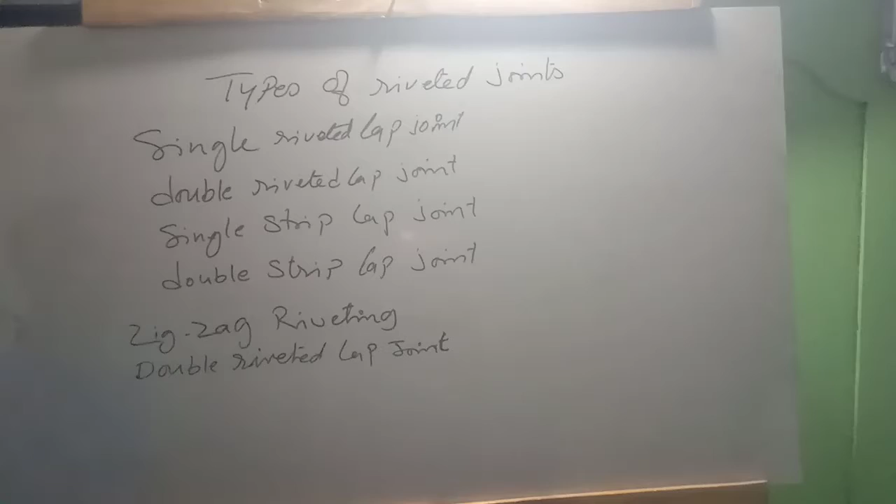Now, types of riveted joints. See, when you are joining two sheets with a rivet, not a small strip of the sheet, big sheets, 1 into 1 feet sheet or bucket length, where the width of the sheet is more, a number of chain rivetings has to be done. So what are you doing? Different types of rivet joints are made.

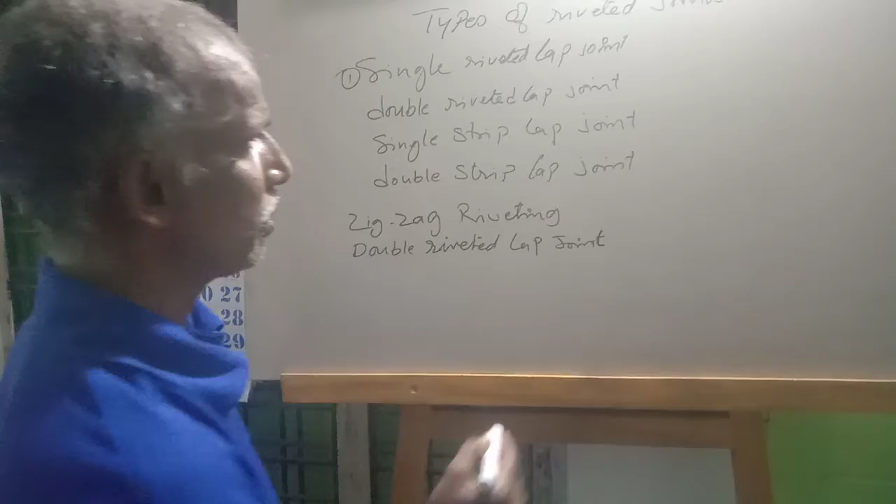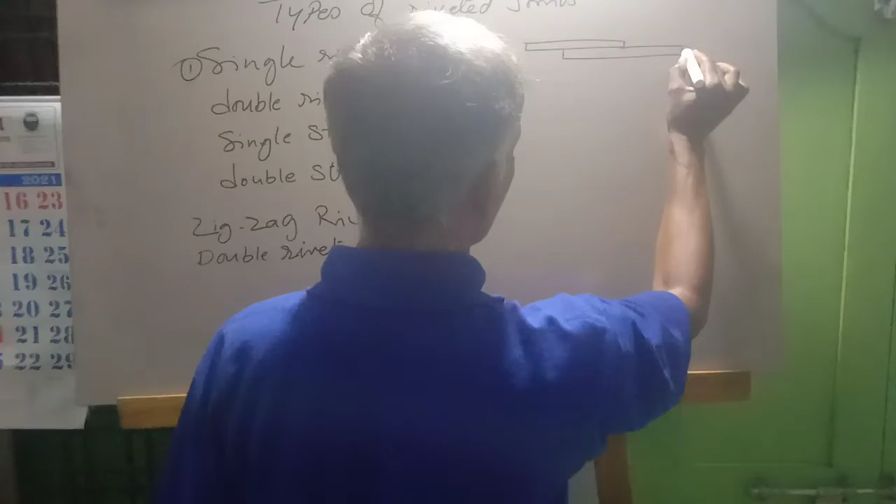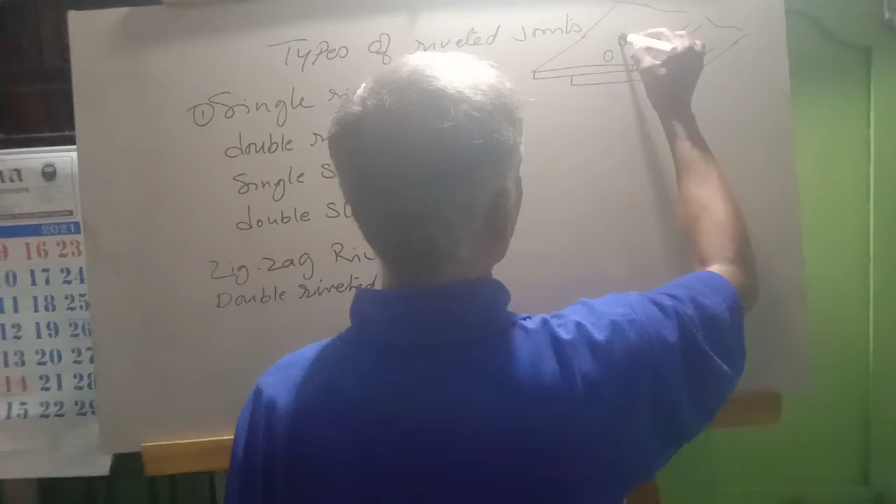First one is single riveted lap joint. Okay. Single riveted lap joint. This is sheet 1 over on the top. What we are putting is called lapping. Okay. Single means the row of rivet will be single. Okay, this is where they do single.

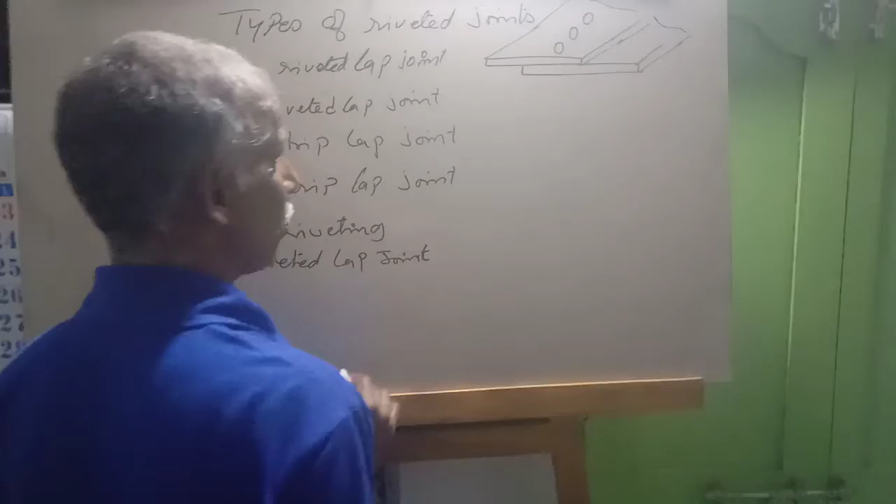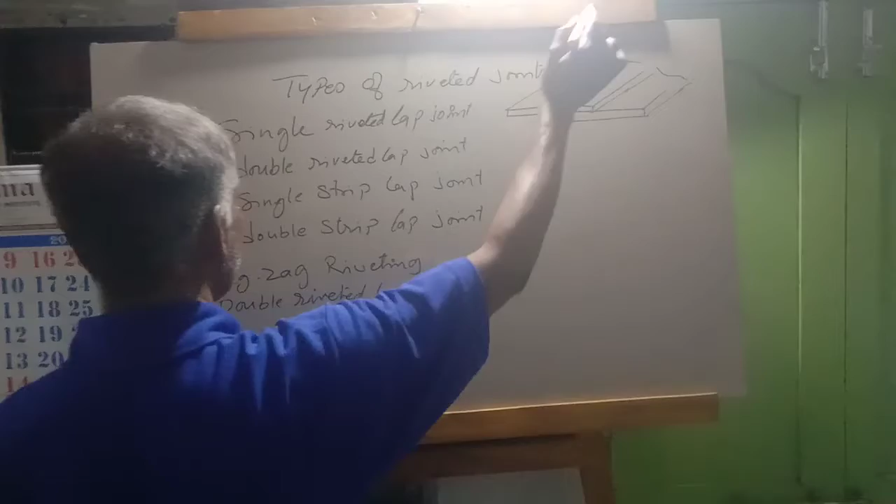Single means what? A number of rivets in a single line is called single. The number of rivet lines is called the number of rows. Only one row is a rivet line. So that is single riveted lap joint. Lap means the sheet is lapped. Now generally they'll do the drawing in this way. Right. Single riveting lap joint.

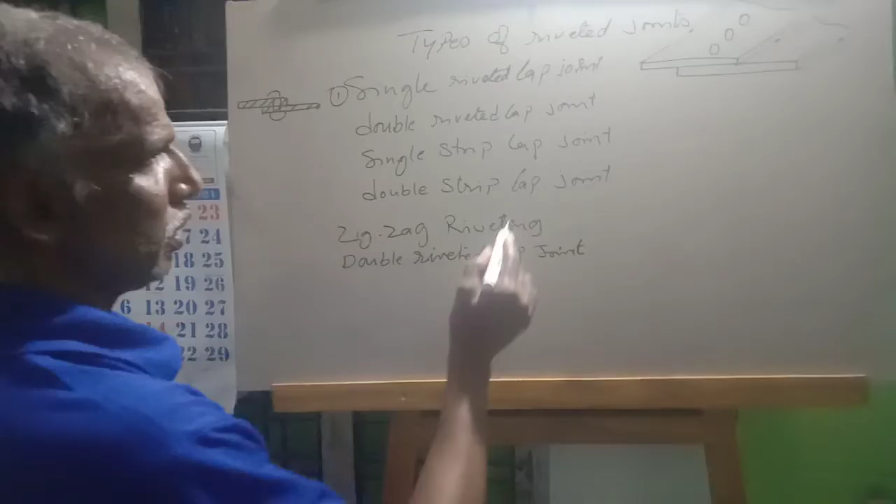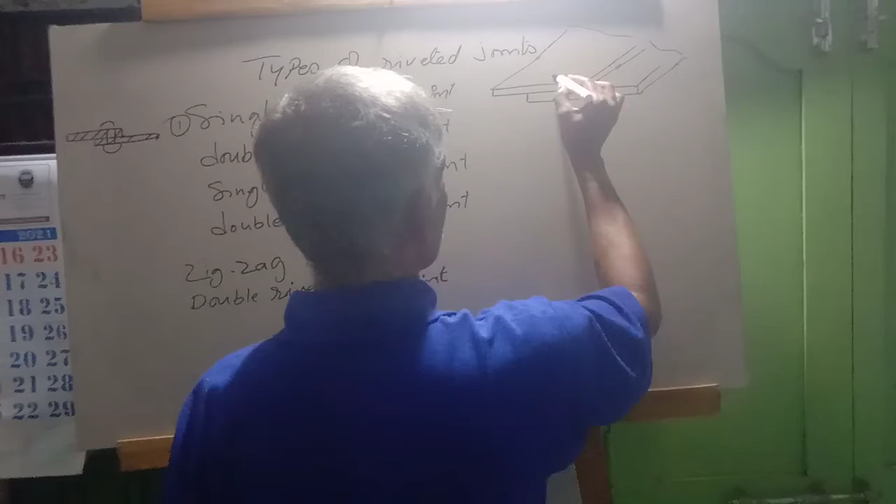Now same way, if it is double riveting lap joint. What we'll do? Here we'll do the riveting, but not a single row, two rows. Here is one rivet, here is one rivet, here is one rivet. Now how many rows of rivets are there? Two rows. That is called double. But the joint is lap only.

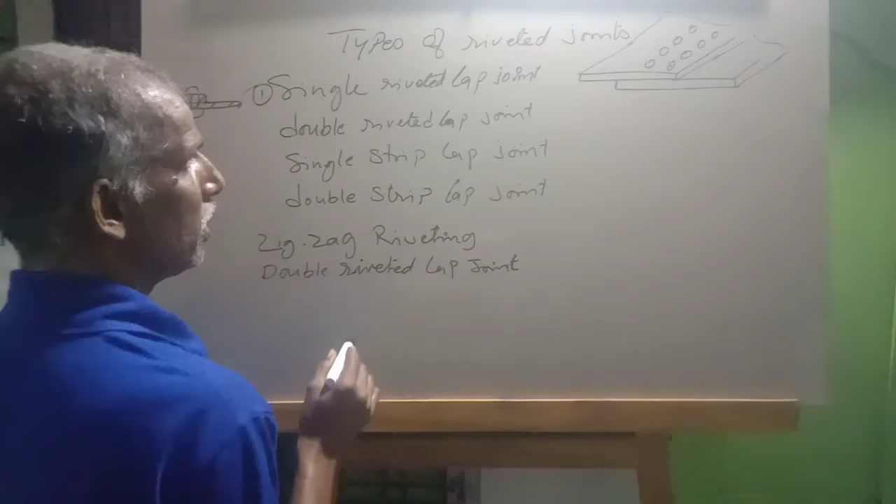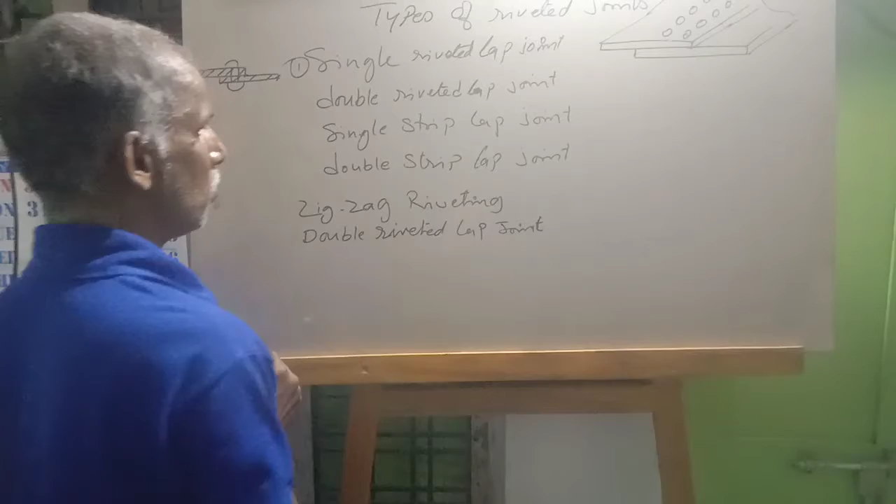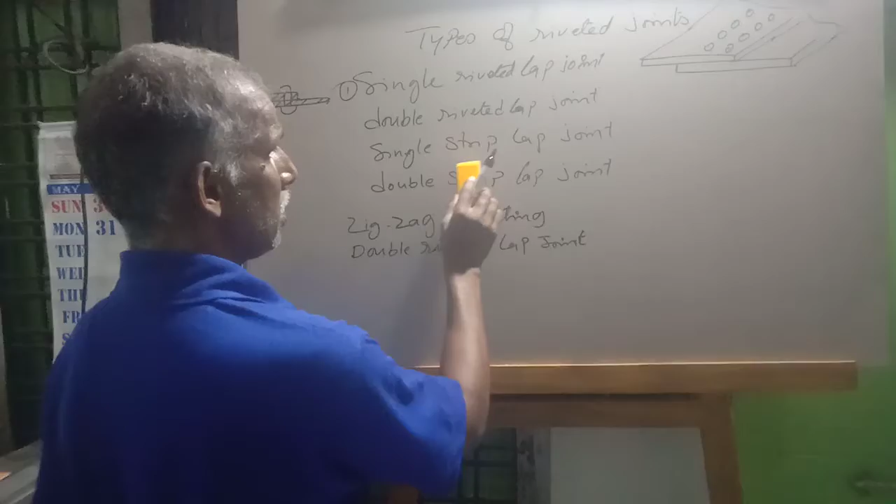If the rivet row is one row, single riveted lap joint. If the rivet rows are two, double riveted lap joint. Now, this is one way of doing lap joint, with two methods, single and double. Now we'll do single strip lap joint. Single strip lap joint.

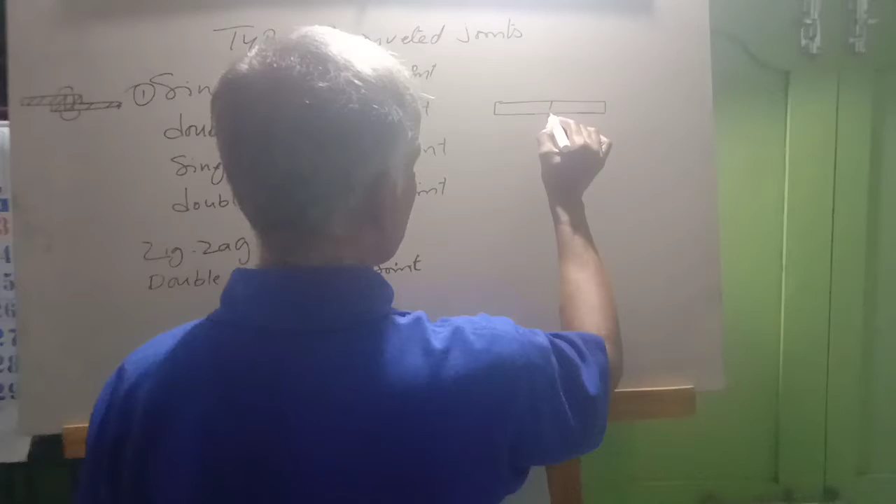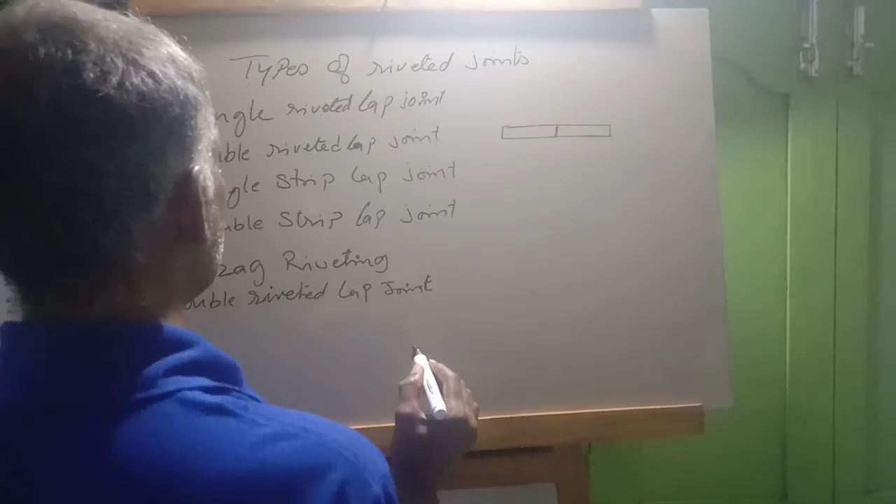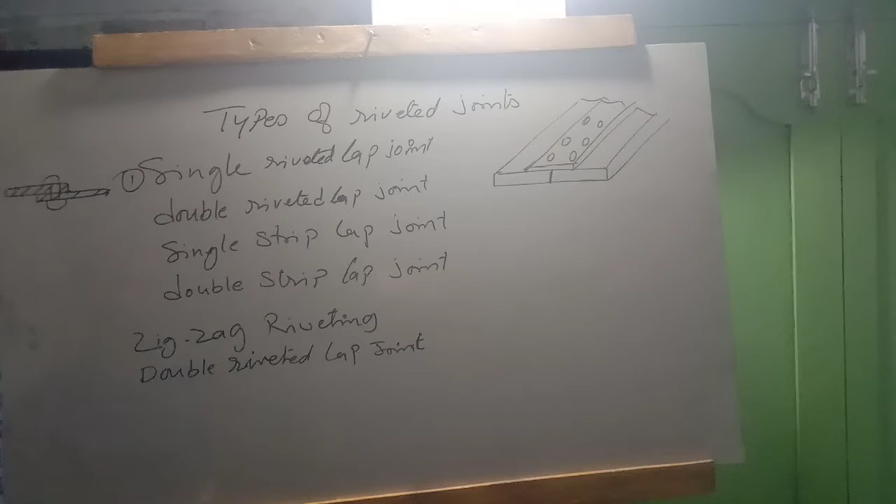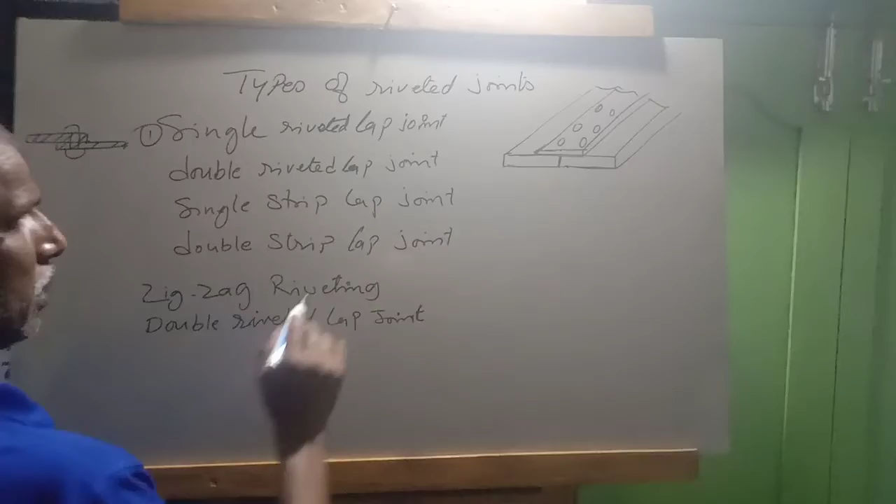Now this single strip lap joint. Single strip lap joint. Now we are doing single strip lap joint. Means two sheets are kept at the bottom at the same level. On the top we put one more strip, and that is a single strip lap joint. Means for one sheet one row of line, for the other sheet one row of line.

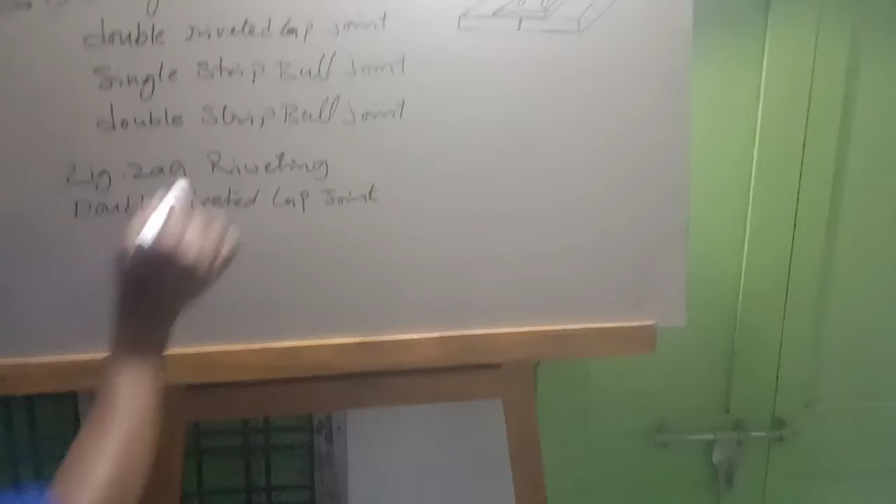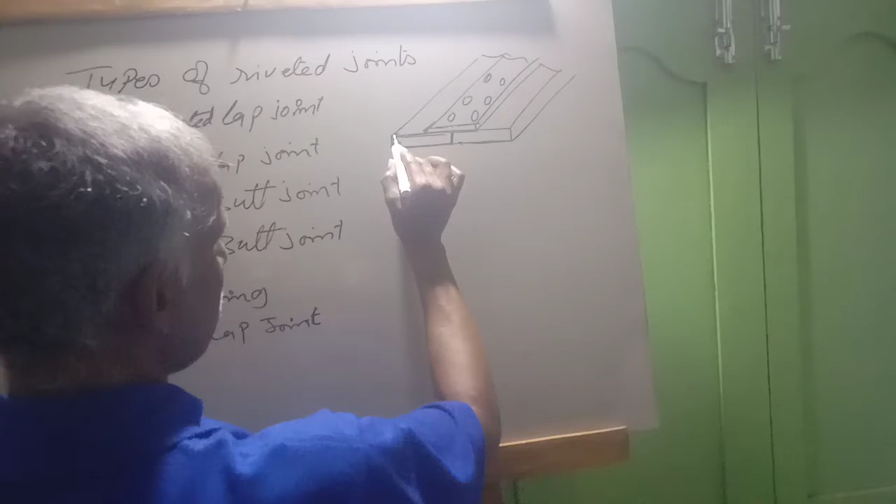Now double strip, double lap. This is not lap joint. This is butt joint. Okay. Now this is single row. See, the sheet is not overlapped on the top. The sheets are kept side by side. On that they arrange one strip; it should have a width for one row, and the diameter we selected, how much overlap, how much distance between rivets, all that we taught in the last class.

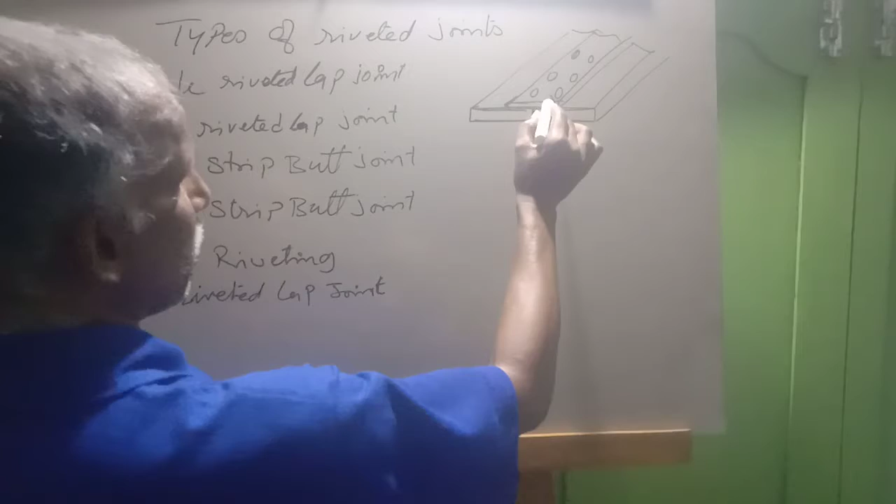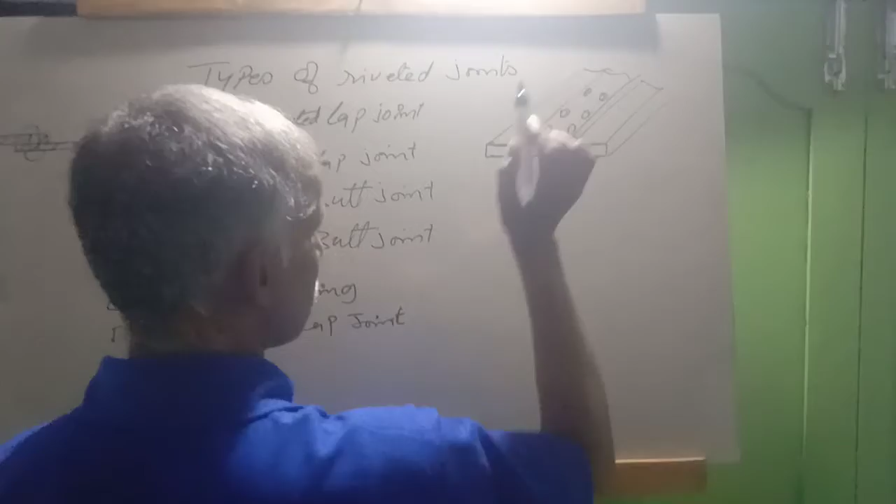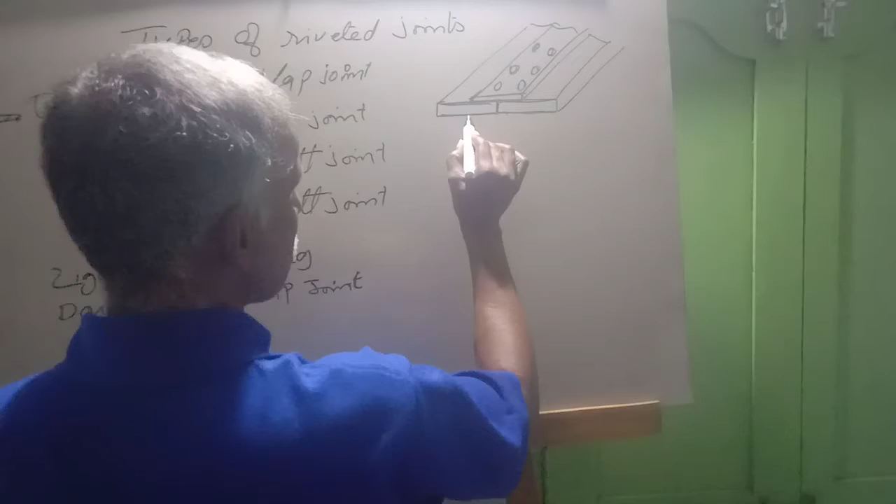Now in this way, putting one strip on these two sheets to be joined, and two rows, means one row in the one sheet, one row in the second sheet. That is called single strip butt. Now see, double strip butt joint. We will make a double strip butt joint, but one more strip also at the bottom we will use.

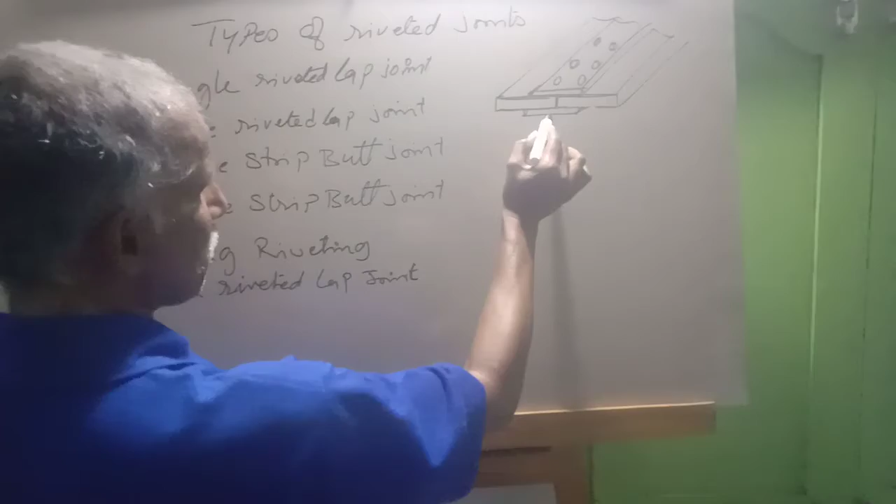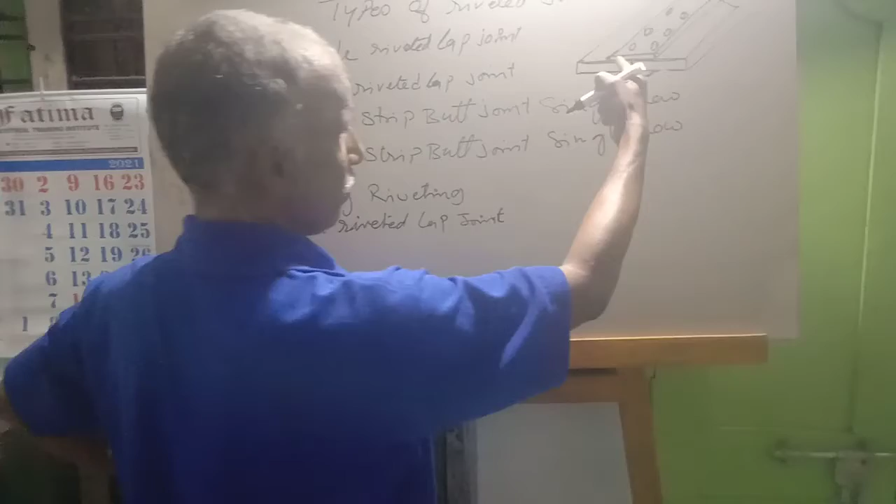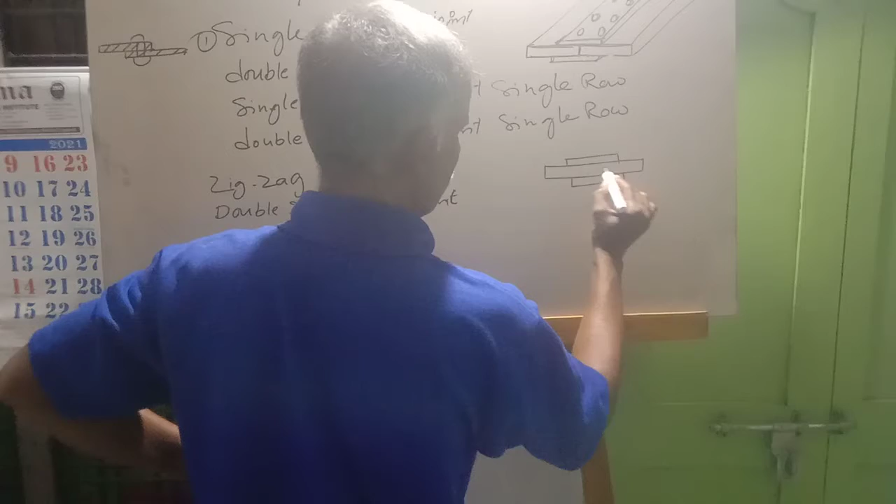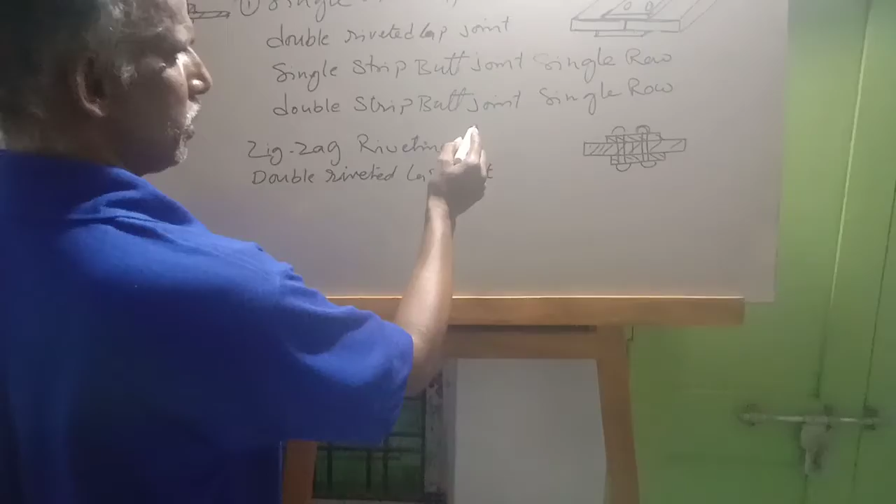So here, single strip means one strip, double strip means on the top and the bottom also. If one strip is kept, single strip; if two strips are kept, double strip. This is single strip, double strip, but single row only. The riveting is single row. This one also single row. Now we do the double row also. If we do the drawing in this way, like this. Now see, single strip butt joint, single row. Double strip butt joint, single row.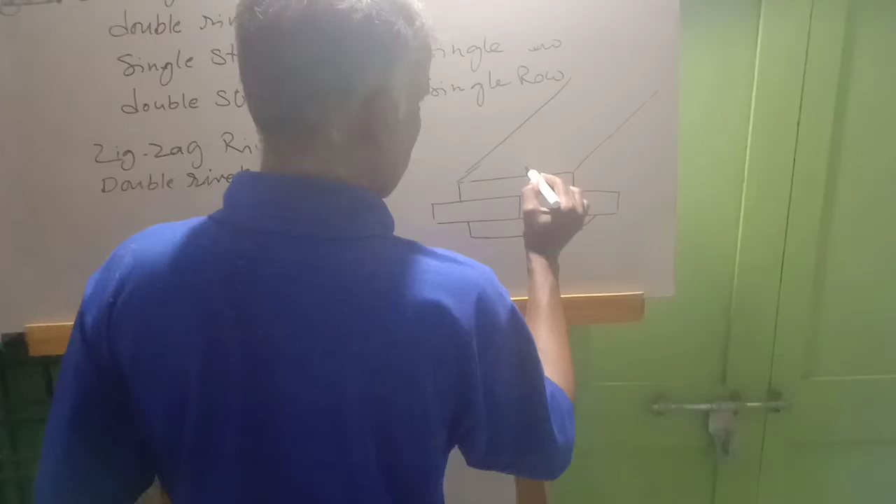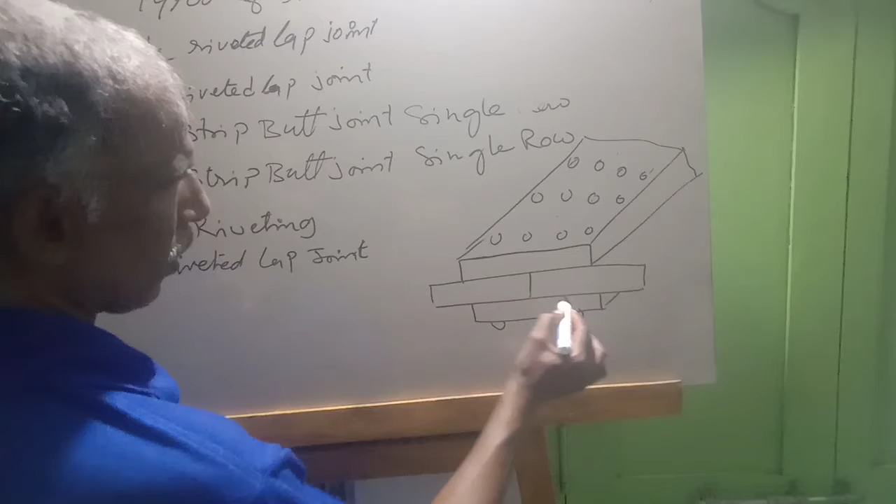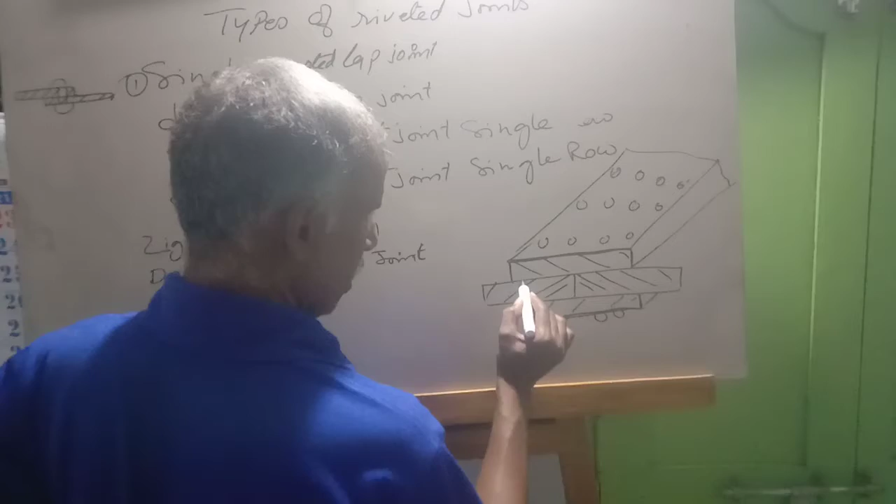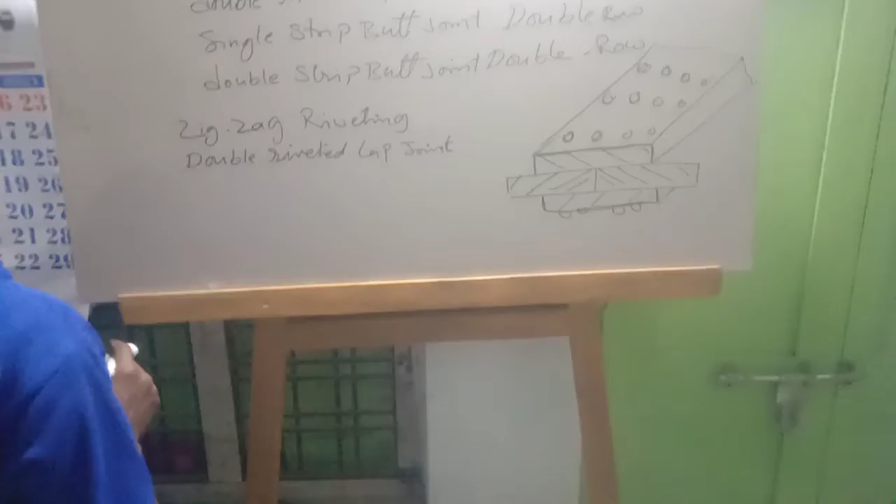Here. Okay, now double strip, double row. See, these two pieces actually we are joining, with two strips, at the bottom and top. Now here for this sheet, two rows are there. On this sheet, two rows are there. That was double strip, single row. Now we are doing double, so we call it double row. Now double strip, butt joint, double row.

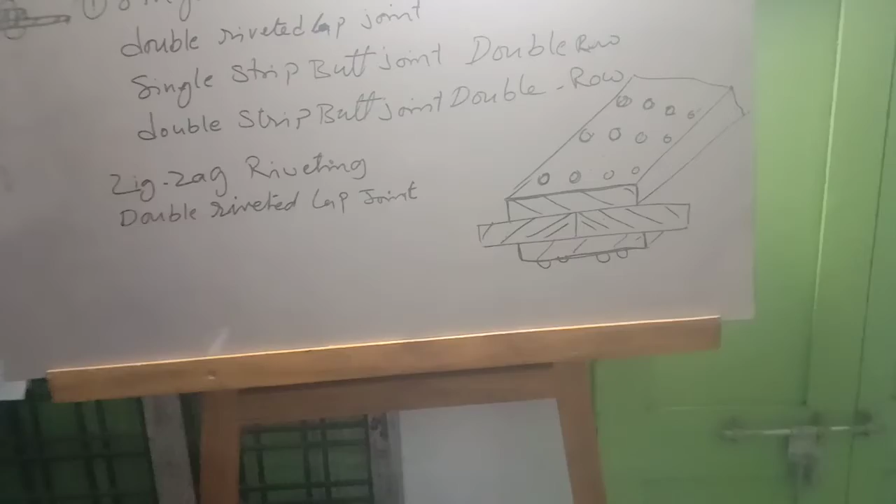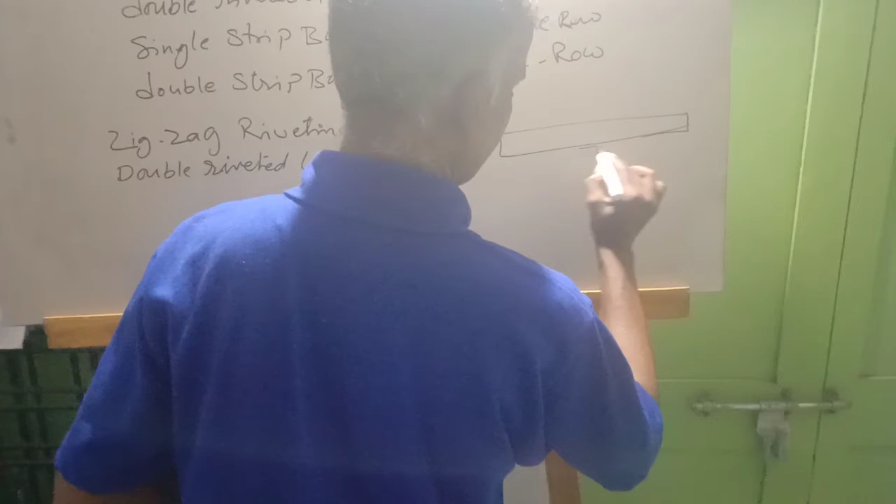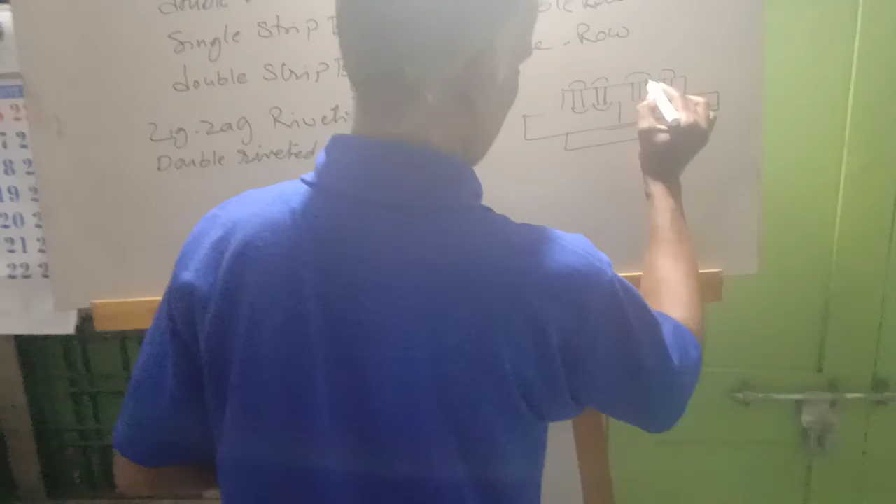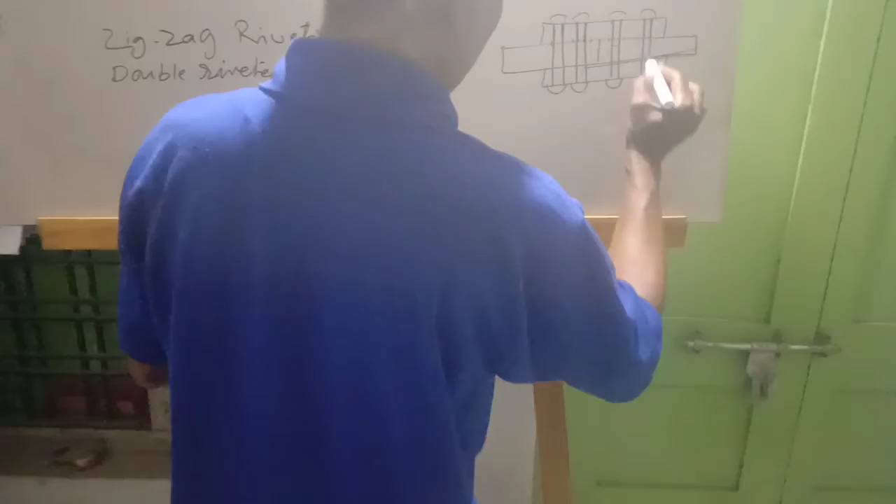Now see, this is not for thin sheets; they use it for ship industries and all, because more rows give more strength and gas leakage will be less. If this also is not sufficient, they will go for another method of riveting. This one, when you see the side view, will be like this. See, double strip, double row. On one side double row, on the other side double row.

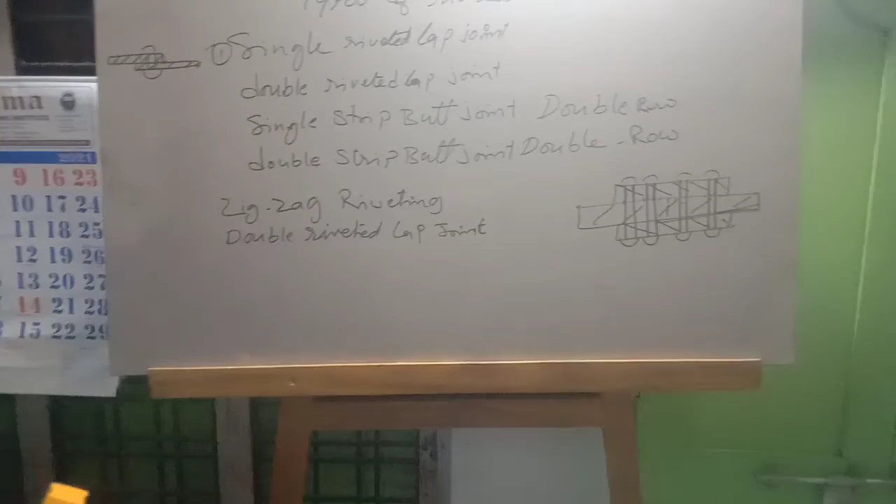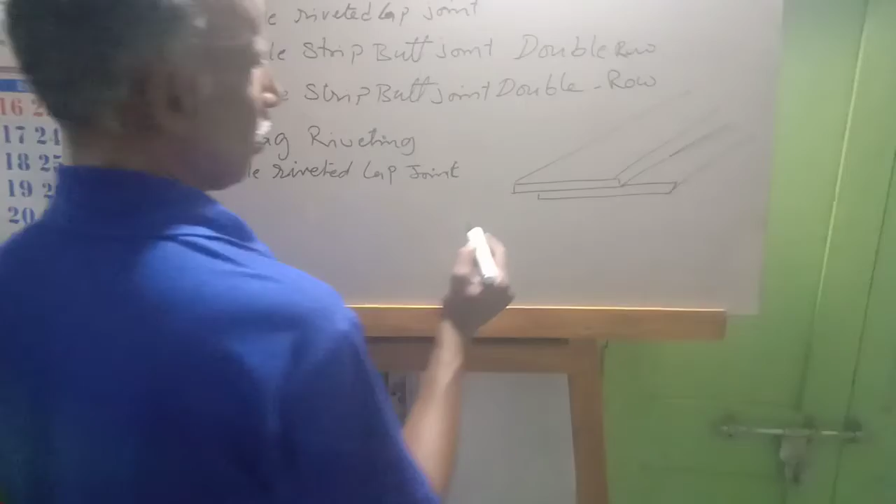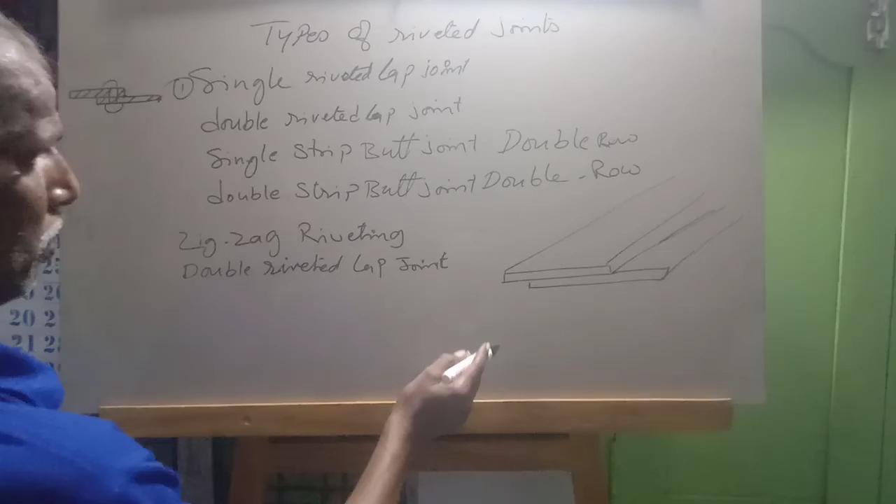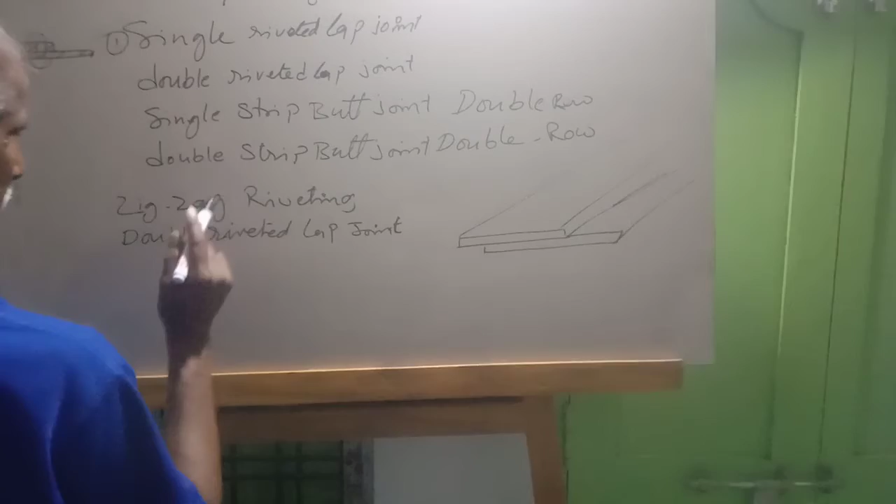Now we have the zigzag riveting also. Now this zigzag riveting, single riveted lap joint. Single riveted lap, not single, zigzag riveting lap joint. Double riveted lap joint, I already wrote here. Like zigzag riveting, double riveted lap joint.

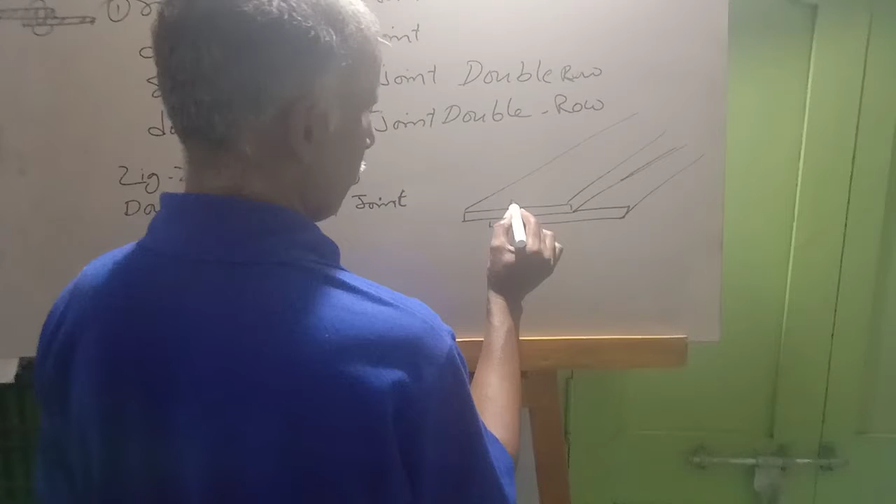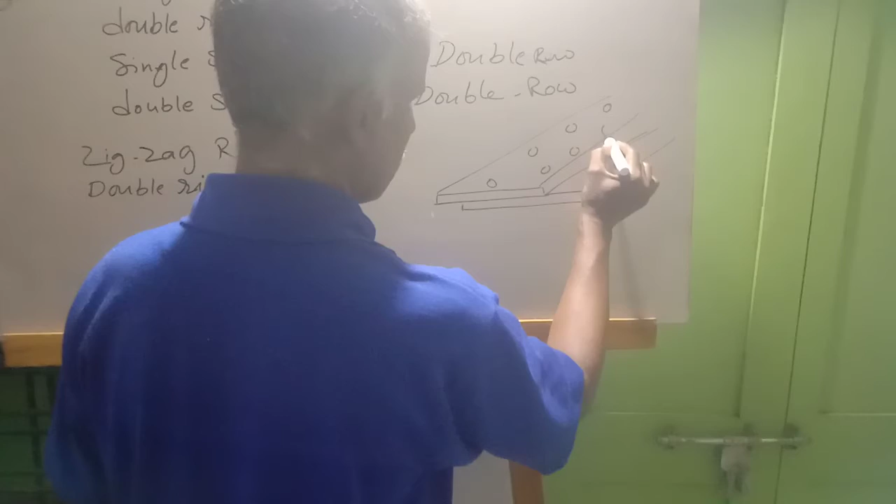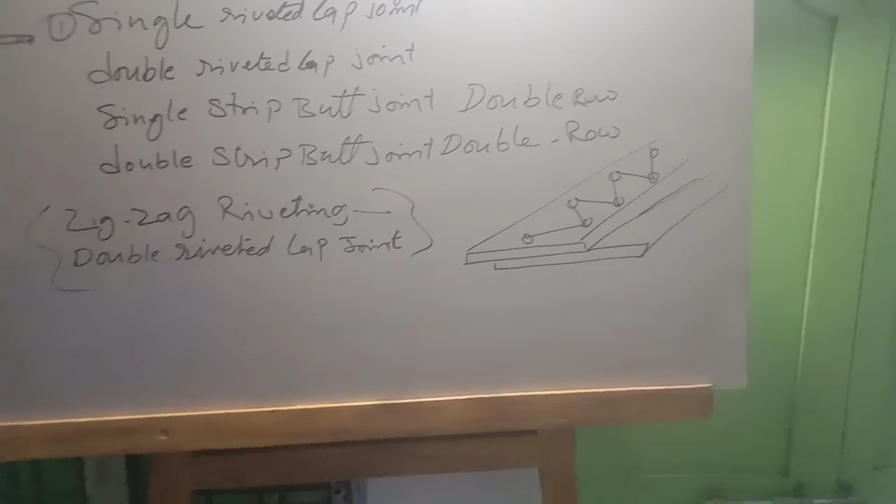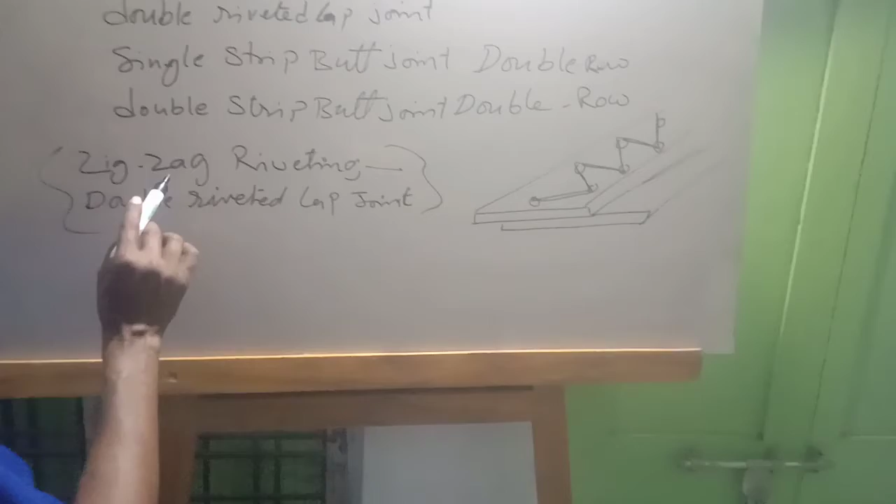Now if lapping is done in a zigzag way. See, before it was parallel here. Now, riveting here, but the next row rivets will be in a parallel line but not opposite to this rivet. It will be a little zigzag. It will have a triangle shape. Zigzag riveting they will do. See, riveting is done in zigzag. But whenever you do zigzag, the rivets will be in two rows.

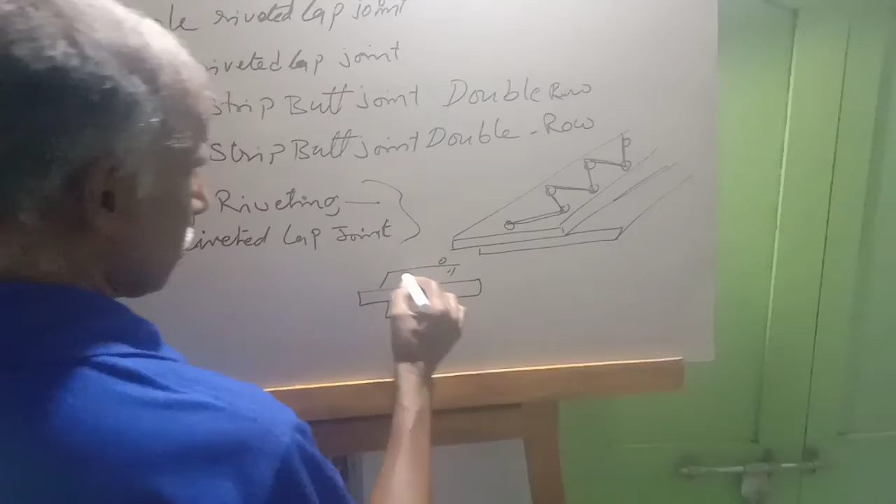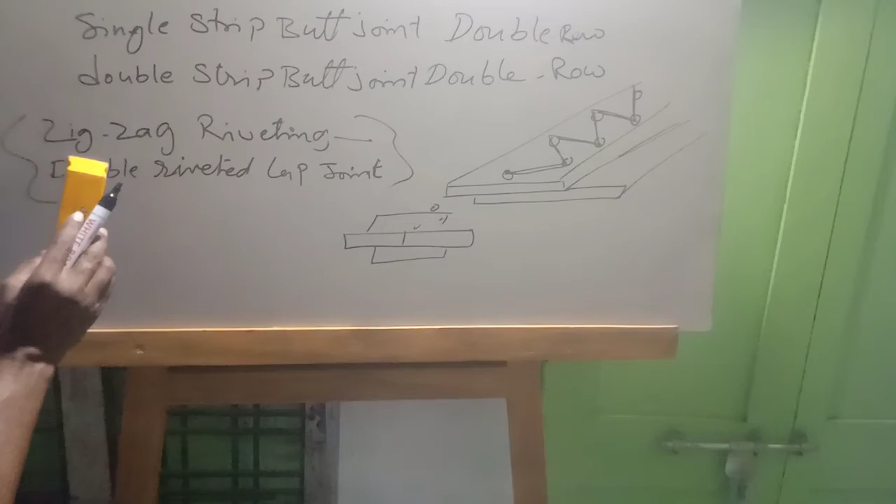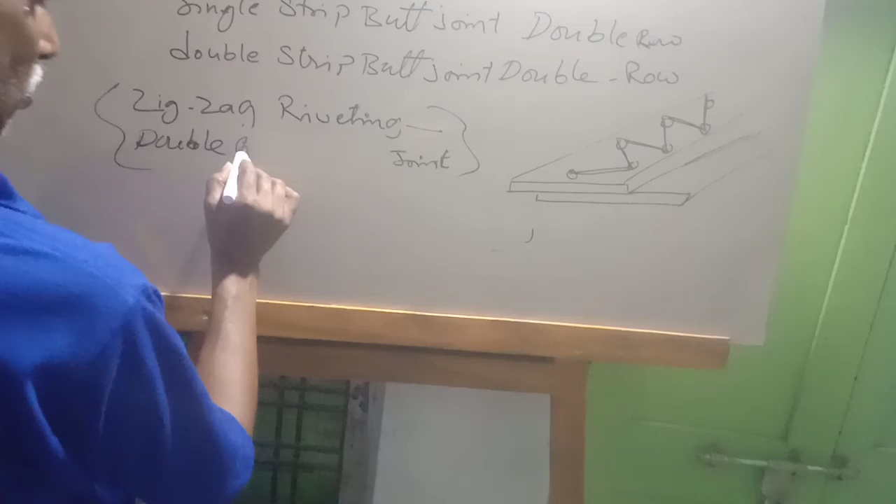Sometimes instead of lapping it will be butt joint also. They will do butt joint also. Here also zigzag will be there. Riveting lap joint, zigzag. Sometimes instead of double riveted we can also call it zigzag riveting lap joint. In this we will get a double row. In the butt, double. Zigzag riveting. Butt joint.

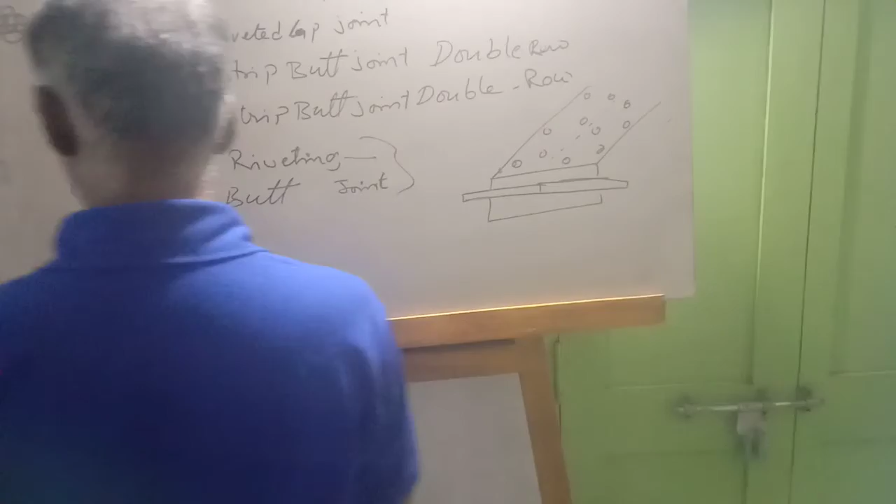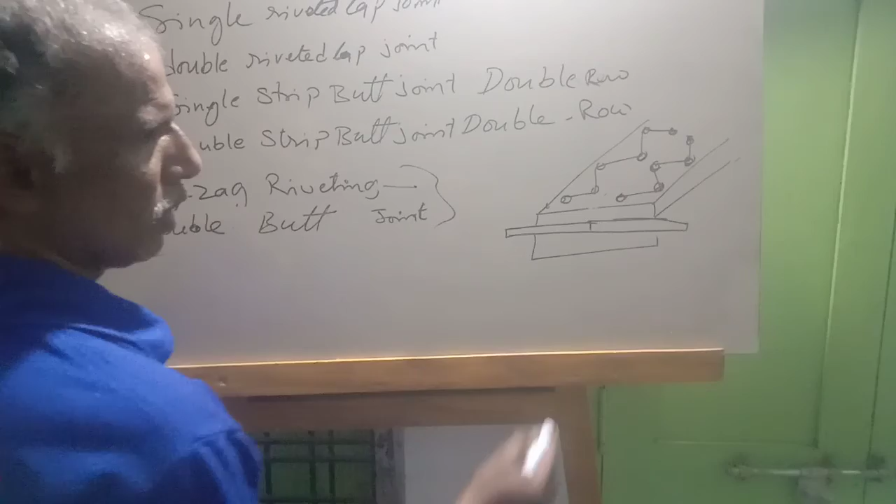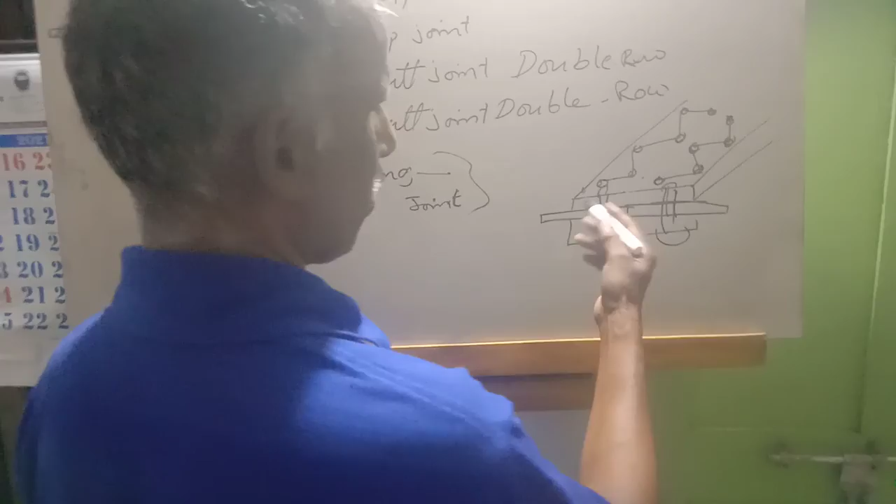When you do butt joint riveting in this way, 2 rows will be forming. Like this. On this one sheet riveting will come here, and on the other sheet riveting will come here. These are different methods, for strength purpose and to avoid leaks.